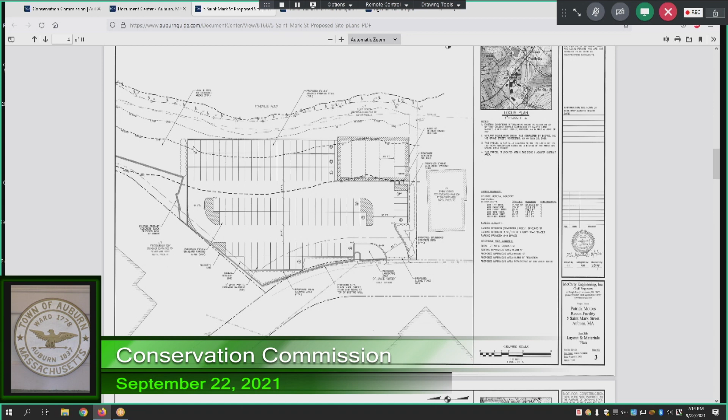Well, let me ask you a couple more questions. When would you propose to begin work? As soon as possible, with the caveat that obtaining materials for construction is beyond difficult right now. The building itself, I think, would have somewhere in the neighborhood of a 12 to 16 week lead time, just to order it and have it fabricated and delivered to us.

There is a significant amount of work that could occur. Obviously, we have to submit a stamp set of plans and affidavits to Caleb's office for a building permit. But then we could go in and do the erosion control, remove the old foundation, remove the old pavement, construct the stormwater basins - all that could occur while we were waiting. Even a foundation could be installed and backfilled, along with erosion control measures. Typically we work right through the winter - you probably saw us battling away at Mazda all through the winter two years ago and last year.

And we'll be doing the same with Volkswagen, so we'll be here in town. Would you notify us when the erosion control measures are in place so we can inspect them? Oh yeah, absolutely. All right, I have no other questions.

Any questions? Any questions, Michelle? No, I do not. Meghan, any questions? No.

Is there any comment from the audience on 5 Saint Mark Street? There being none, is there a motion to close the public hearing? So moved. Is there a second? Second. Is there any discussion? All those in favor say aye. Aye. Aye.

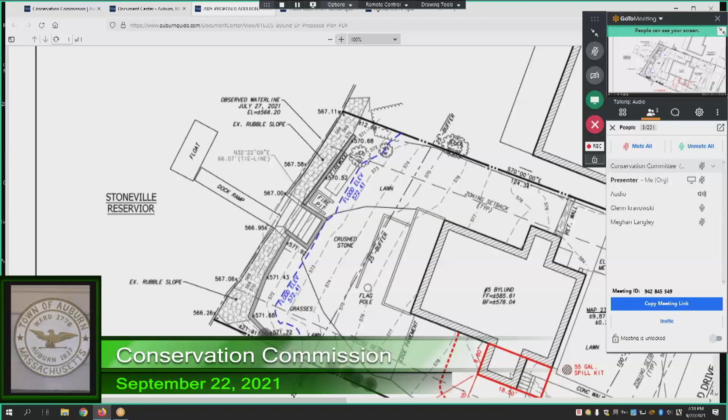So based on my observations and my discussion with the homeowner, I'm satisfied. Give me time to review what I had sent in. If that was the discussion, I appreciate it again, thank you very much. Before Mr. Grabowski leaves us, are there any comments? Nope. Meghan, any comments? No. All right.

In that case, is there a motion to close the public hearing? So moved. Is there a second? Second. Any discussion? All those in favor say aye. Aye. Okay, it's a vote. Thank you, Commission, very much. Thank you, Mr. Grabowski.

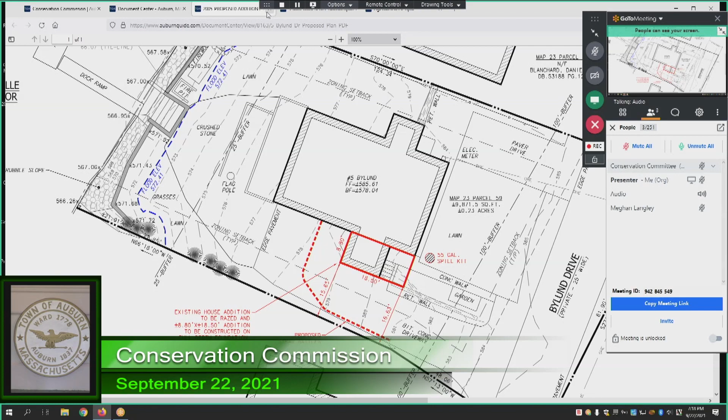All right. The next item on our agenda is a 7:20 public hearing, accessible housing for children, elders, and disabled, LLC. A notice of intent to build a single-family home at 16 Perry Place. Is there a motion to open? So moved. Is there a second? Second. Any discussion? All those in favor say aye. Aye. Aye. Aye. All right, it's a vote. Good evening again, gentlemen.

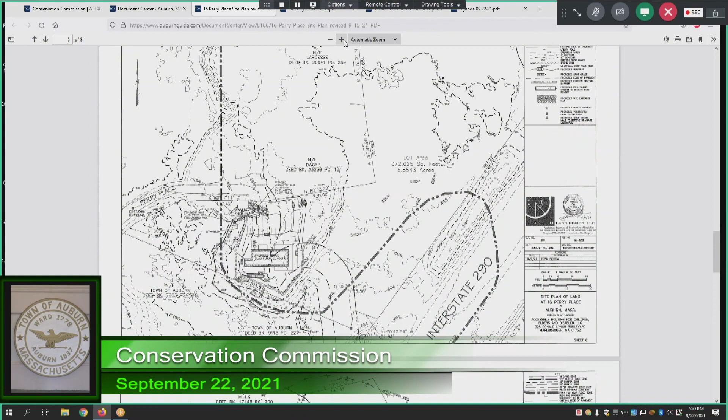In order to pick up the runoff, we install a VortSentry catch basin, a special catch basin with a swirl chamber in it to capture some solids above and beyond what a typical catch basin gets. We would discharge that collected runoff, which would otherwise go into the Perry Place turnaround circle, at a point just about 7 feet off the wetlands.

We submitted a written waiver request for that work being within 25 feet of the wetlands. Our justification is that in order to pick up runoff here before it gets into Perry Place...

The VortSentry catch basin has to have a rim grade of around 497.5. The minimum separation between the rim grade and the pipe out that these structures can have is 3 feet, so at 497.5 at the grade, that gives you 494.5 for the pipe leaving that structure.

The 25-foot line is really just above the 496 contour, so in order to discharge from that 494.5, it's unavoidable—you are required to discharge into the 25-foot zone.

We also proposed what different folks call a scour hole, though I think it should be called an anti-scour hole. The idea is you have an excavation that you fill with gravel and stone in order to dissipate any erosive force of the discharging runoff, and you'll get some infiltration of that discharge, especially at low flow times.

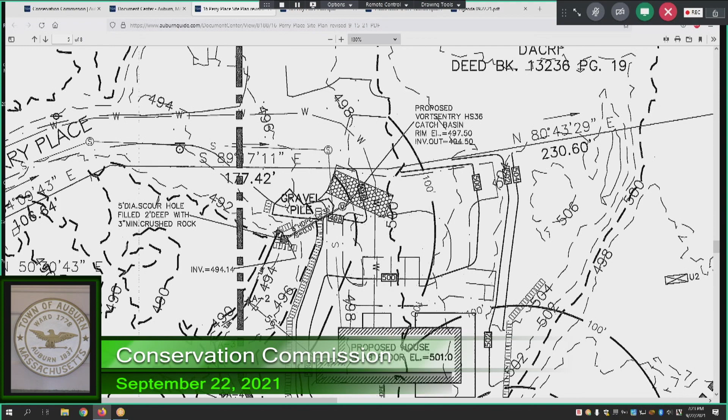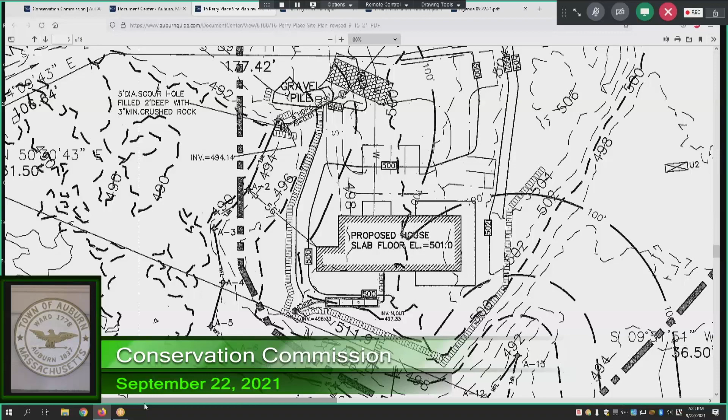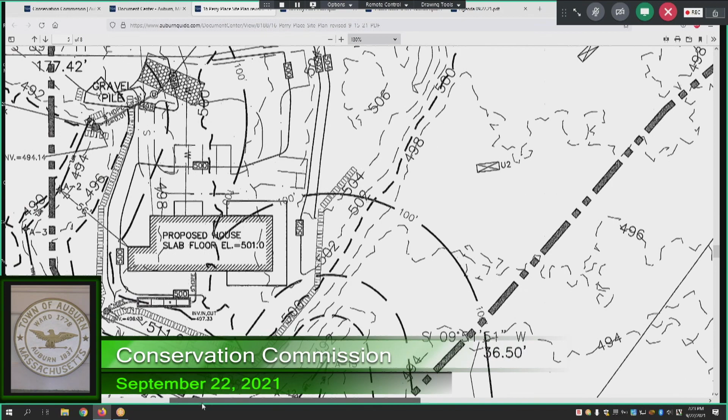It says scour hole on it, so you know it's updated, that particular one. All right, I'll leave it at that. I'll try to answer any questions that you may have.

All right, I have no questions. Any questions? Patrick? Can you just describe the area that you expect to have all the storm water collected into the new BMP?

Sure, I would think it would be almost all of the drive, because this is a 500 elevation contour, and this right here is 498. So this is actually draining away from the proposed house towards this grass strip, towards this piece of driveway. Water over here.

What are you saying? All right, let him finish his presentation, then you can come up and look at it, okay? He has the floor. Go ahead.

So the answer is it should pick up all of this driveway above the very first few feet off of Perry Place.

Thank you. That's fine.

So I was just explaining to the committee member, this is a proposed 500 elevation contour, and this proposed contour is 498. All of this area from the building forward drains towards this grass strip and into the driveway and out to that exit. And all of this part of the driveway drains down into that exit. So really you can pick up all of this driveway, all of this grass strip, and the area in front of the house.

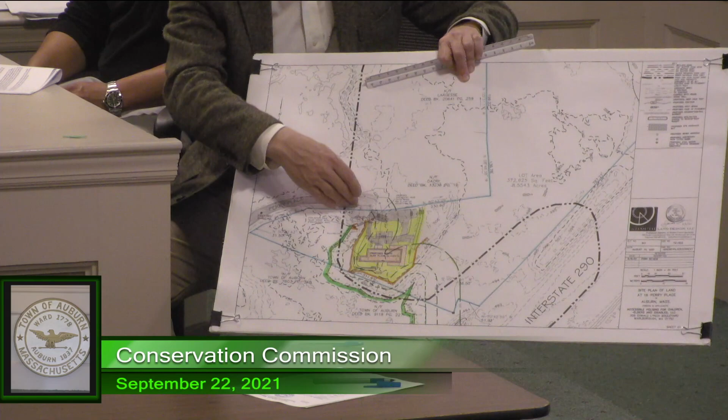A couple other questions. First of all, let me just say, we're not opposed to this. We just want to make sure it's going to be environmentally safe for us in the neighborhood.

What do you plan on doing with snow? Where is the snow going to be piled and moved to? Because according to that, it looks like they took away the 2 parking spots on the northeast corner of the map. The way you have the driveway, you had 2 parking spots in the northeast corner of the map.

Before, we showed 4 spaces here and 2 here, and we're still showing 4 spaces here, basically off the front of the proposed house, and 2 spaces to the side.

The way I've colored this is to try and show the proposed paved area in gray. We showed 4 spaces here before, they're still there. We showed 2 spaces off here, and I thought at the last meeting they were on the northwest corner. Northeast, I'm sorry, my apologies, northeast corner.

There was, may I approach? You may approach. Right here, if I'm not mistaken, there were 2 spots here, 4 here, now what's this? The plan hasn't changed. What he's pointing out, just for the other commission members, is he's wondering where these spaces were before.

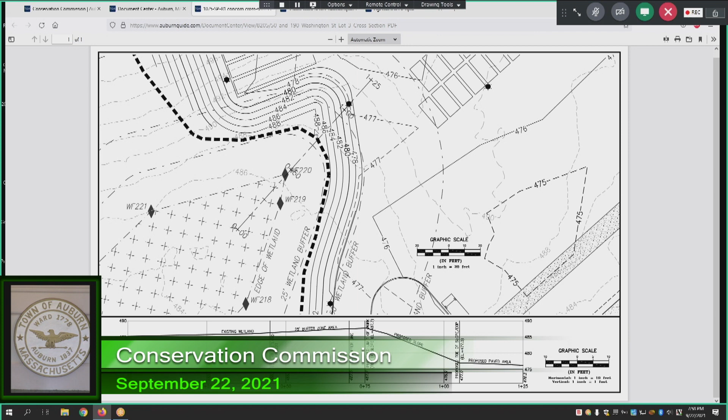So, are there any other questions? I see that we have a caller, the mysterious caller 3. Who's that? They choose to remain silent.